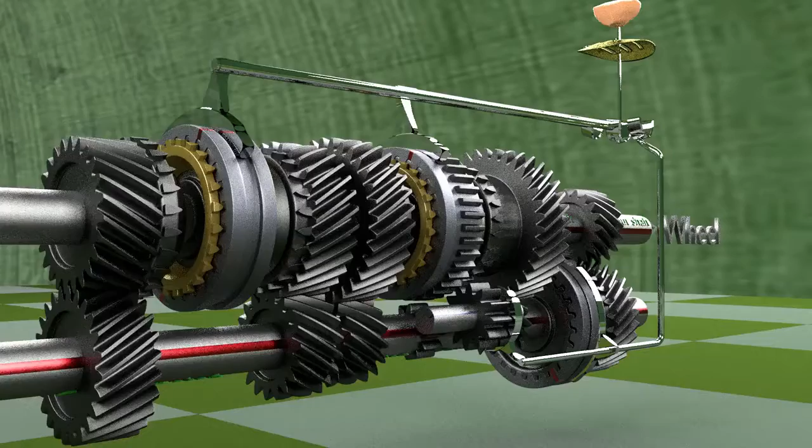A manual transmission, also known as gearbox, is a type of transmission used in motor vehicle applications that uses gears to provide speed and torque conversion from the engine to the wheels of a motor vehicle.

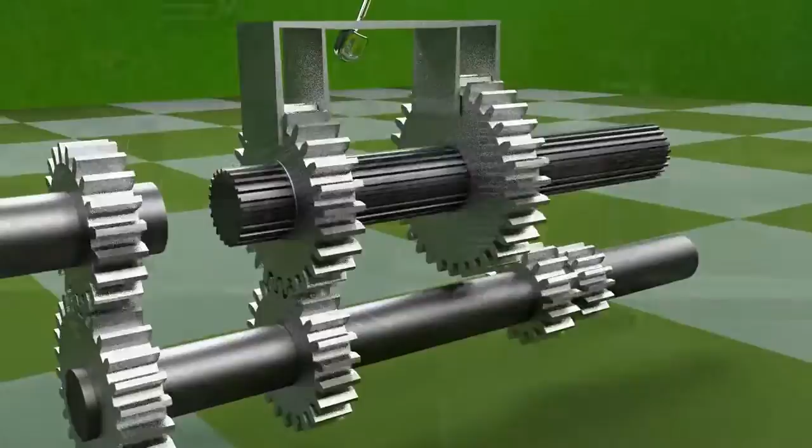In this video, the concept of gear ratio, sliding mesh gearbox, constant mesh gearbox, double declutching, and synchro mesh gearbox, which is used in most modern vehicles with manual transmission, will be explained.

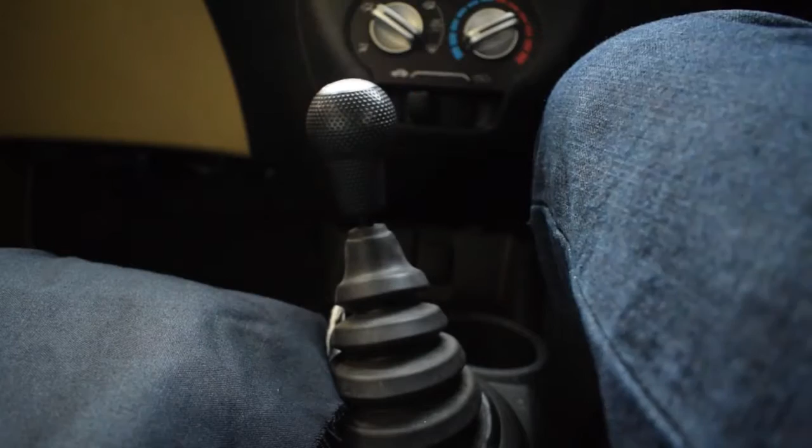Consider two gears which are in mesh with each other. The number of teeth on the larger gear is twice that on the smaller gear. Therefore, the smaller gear will have to make 2 revolutions for every 1 revolution of the larger gear, so that it can traverse all the teeth on the larger gear. That means the smaller gear is rotating at double the speed of the larger gear.

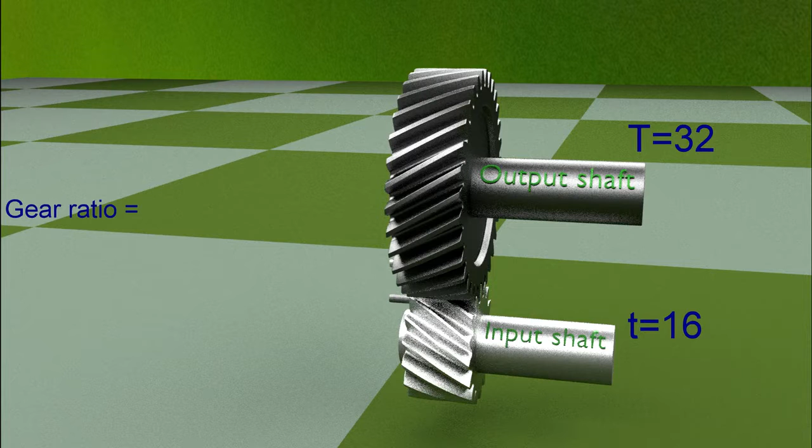The gear ratio is defined as input speed relative to output speed, and is equal to the number of teeth on the output gear divided by the number of teeth on the input gear.

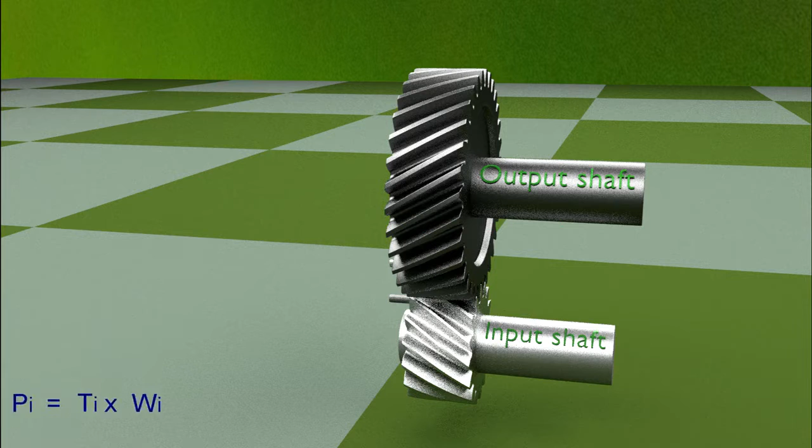The power input is given by input torque times the input gear rotational speed, and it must be equal to the output power, that is, output torque times the rotational speed of the output gear.

Since the rotational speed of the output gear is half of the input gear, the torque delivered by the output shaft will be double the input torque.

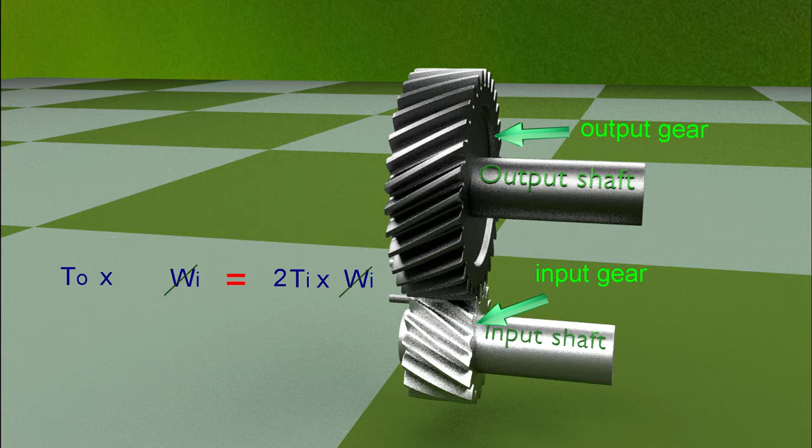This means that we can get large torque at low speed by applying low torque but at higher speed. This basic principle is used in a gearbox to achieve different torque and speed requirements.

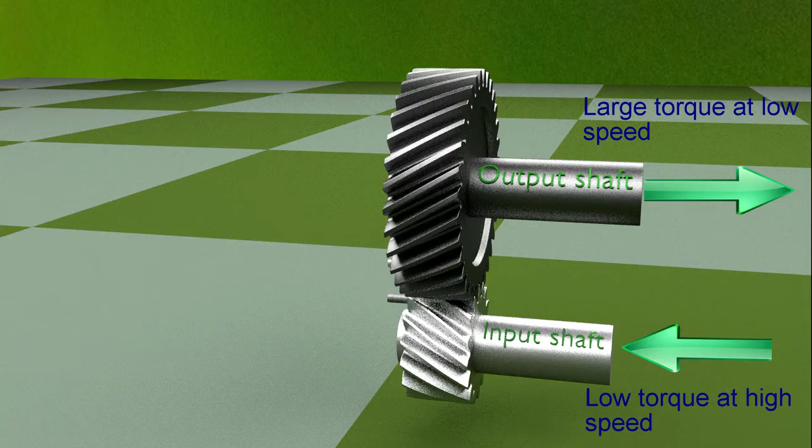An automobile requires large torque when starting from rest, climbing a hill, or pulling a load. In these situations, the speed of the vehicle is not so important. On the other hand, when running at high speed on a level road, high torque is not required because of the momentum of the vehicle, and it would be more preferable to just keep the wheels rotating at higher speed.

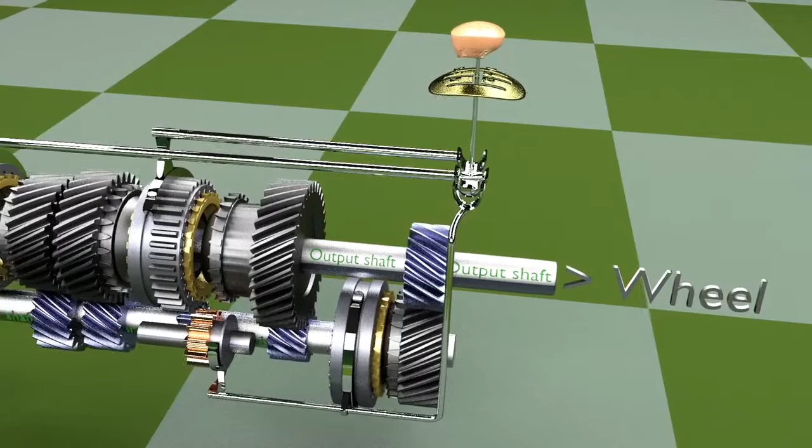The engine is not capable of working efficiently for such a wide speed range. Therefore, to permit this relative motion between the engine and the wheel, a set of gears called the transmission system, or gearbox, is used.

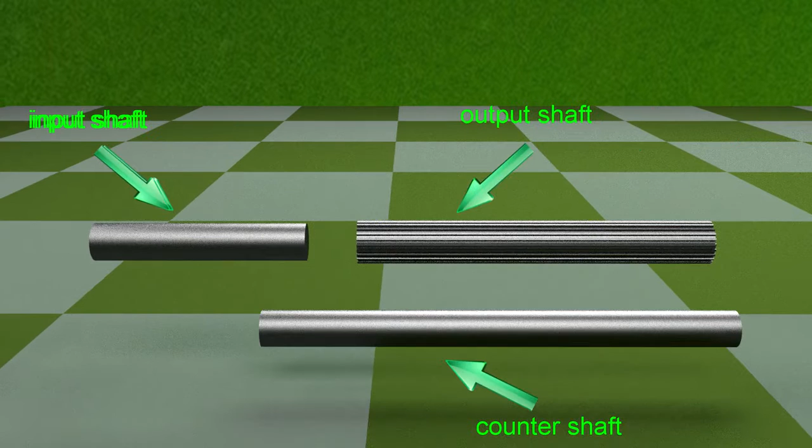A sliding mesh gearbox is the simplest and oldest type of gearbox. It consists of the input shaft, the output shaft, and counter shaft. The input shaft derives power from the engine and transfers it to the output shaft through gears mounted on the counter shaft.

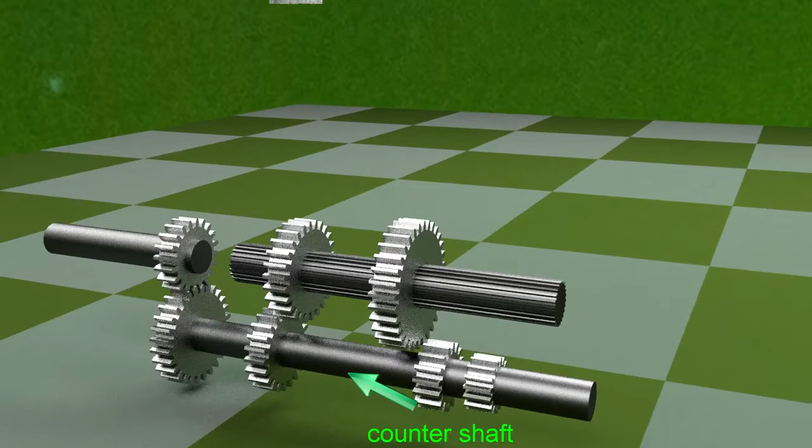The output shaft then transmits it to the propeller shaft for onward transmission to the road wheel. The input shaft contains a gear called the clutch gear, which is in constant mesh with the counter shaft.

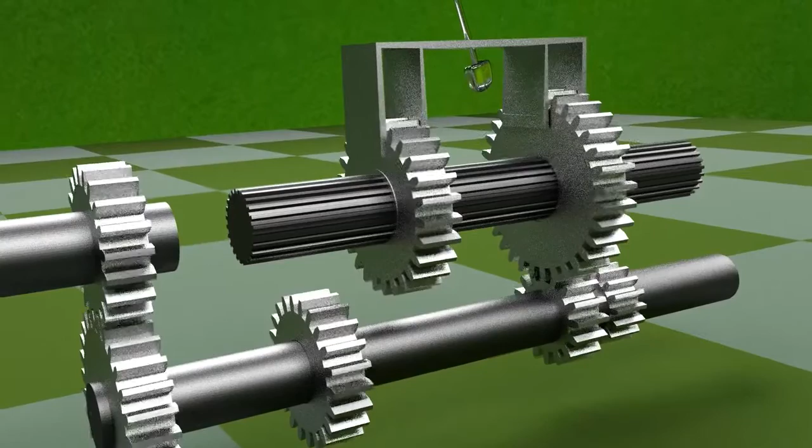The output shaft is splined, and gears on the output shaft can slide axially to mesh with the corresponding gears on the counter shaft, and therefore can have different gear ratios.

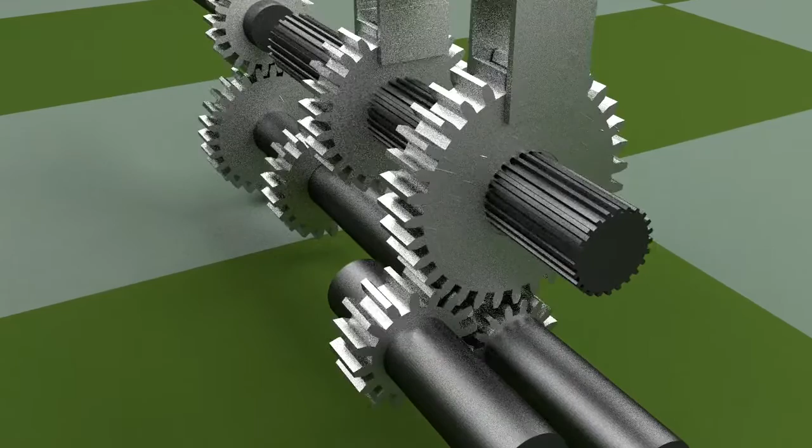Shifting gears in this type of gearbox is noisy and requires considerable skill to shift gear without damaging it. To overcome this difficulty, the constant mesh type gearbox was developed.

Similar to the sliding mesh gearbox, the constant mesh gearbox consists of an input shaft which derives power from the engine through a clutch.

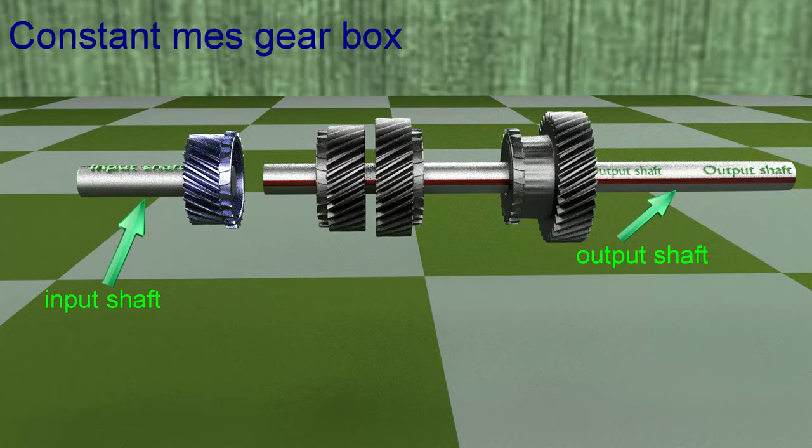The gears on the output shaft are not fixed and are free to rotate on the output shaft. These gears are shown by dark color.

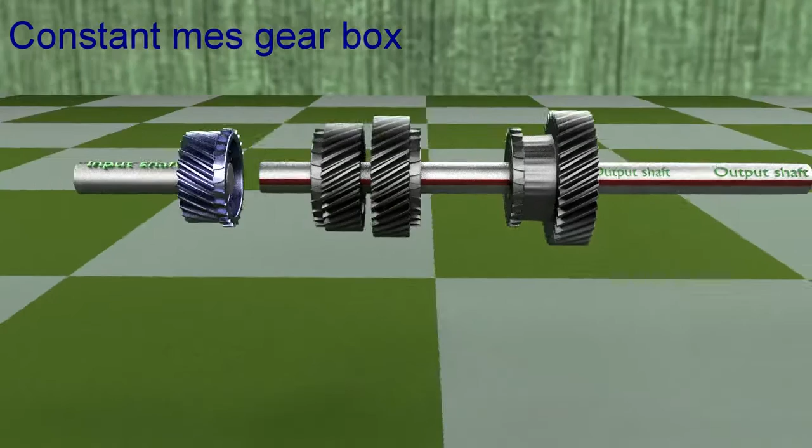Different size gears are fixed on the counter shaft and cannot have any type of motion relative to the counter shaft. The fixed gears are shown by blue color.

The gears mesh with the corresponding gears on the output shaft and always remain in mesh. These meshing gears have different gear ratios.

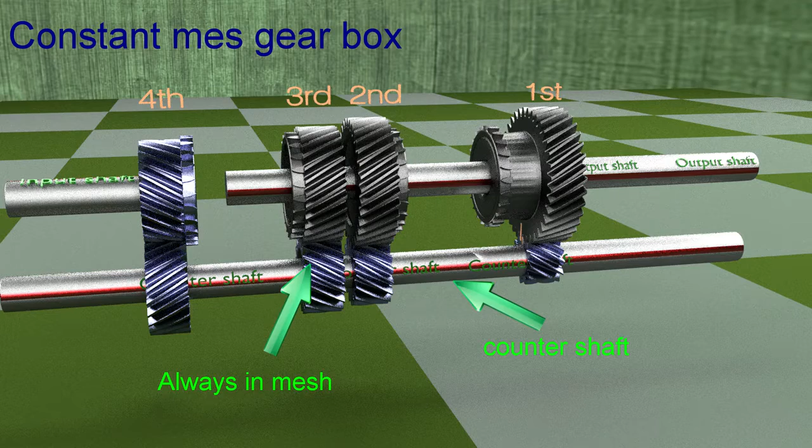For example, for the first gear, the larger gear has 3 times the teeth on the smaller gear. Therefore, the larger gear turns 3 times slower than the smaller gear and can transmit 3 times the torque available at the counter shaft.

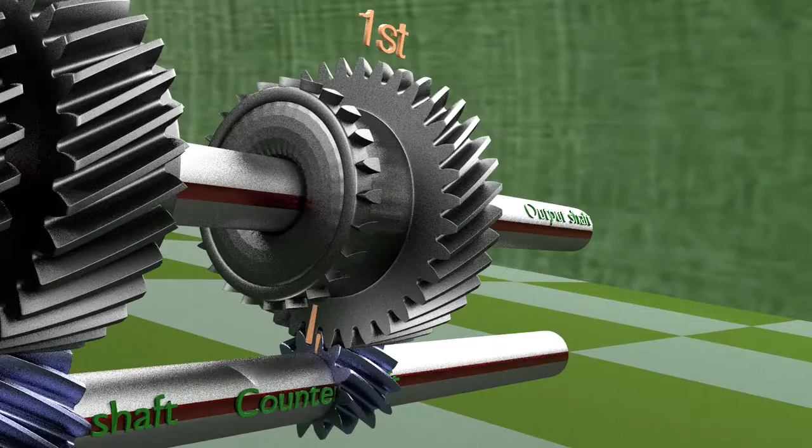Similarly, for the second gear, the number of teeth on the larger gear is 2 times the number of teeth on the smaller gear. Therefore, the larger gear turns 2 times slower than the counter shaft. In fact, all the gears on the output shaft rotate at different speeds according to their gear ratio.

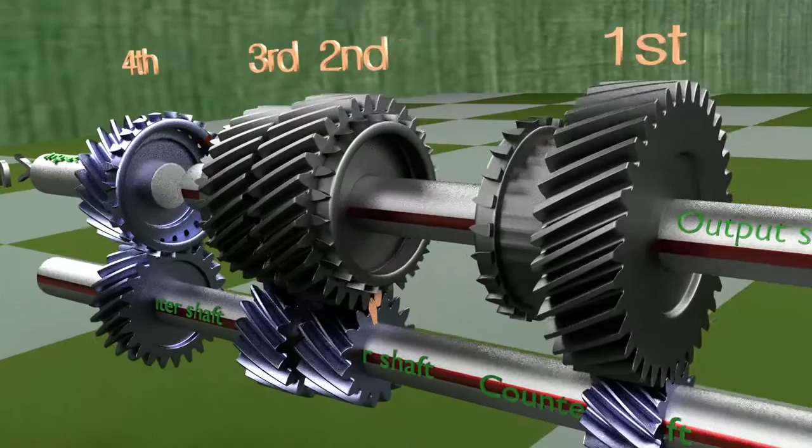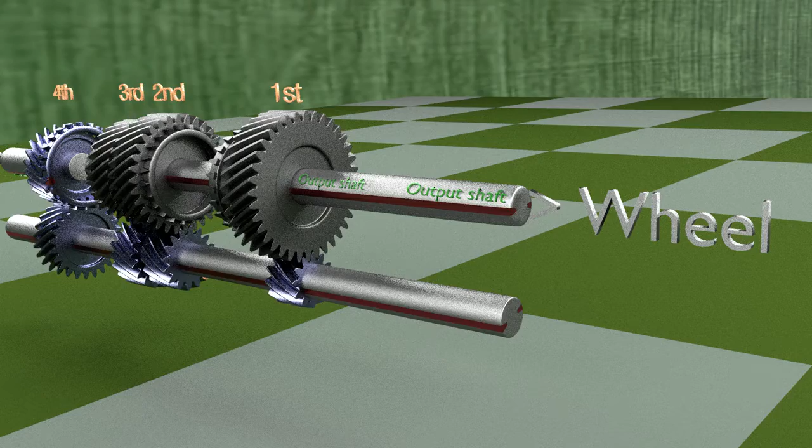On the other hand, the output shaft is connected to the wheel and hence rotates at a speed related to the wheels. For transmitting power to the output shaft, one of the freely rotating gears needs to be locked to the output shaft.

To do so, a hub is fixed to the output shaft. Thus, the hub rotates with the output shaft.

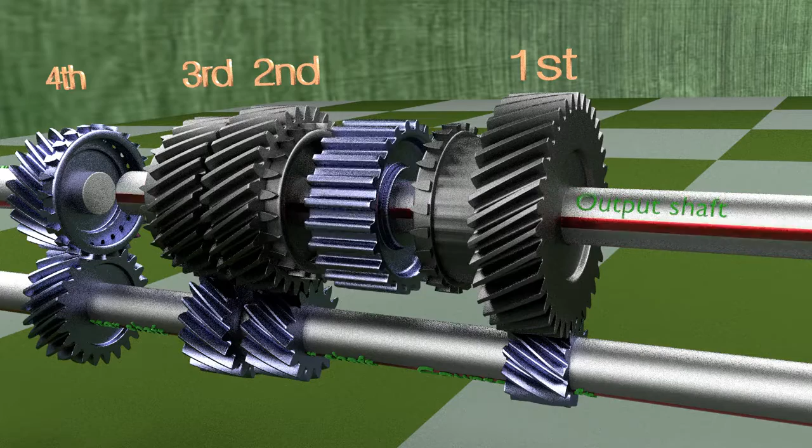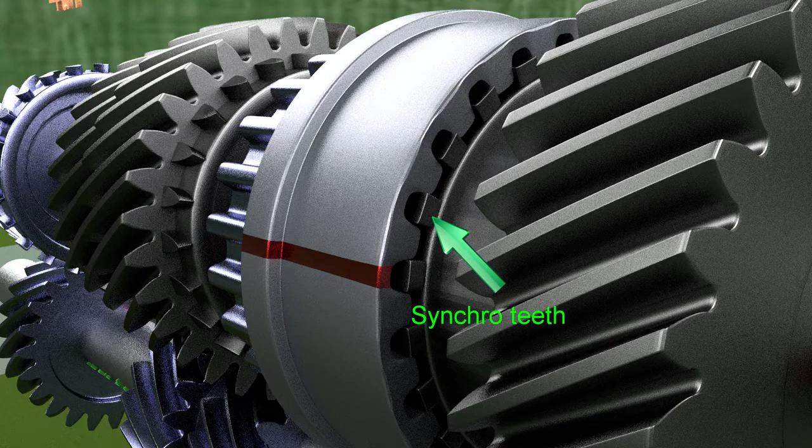A sleeve is splined to the hub and can slide axially on the hub. This sleeve can be slid and engaged with the synchro teeth on the side of the gear. This locks the gear to the output shaft through the hub.

Thus, the locked gear, the output shaft, shift sleeve, and the hub act as one unit and rotate at the same speed.

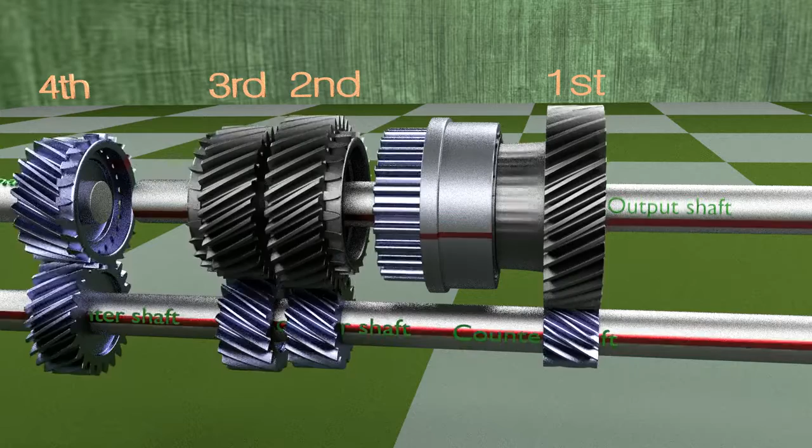Similarly, the sleeve can be slid to engage with synchro teeth on the side of the second gear, and hence second gear gets locked to the output shaft through the hub. Now second gear and output shaft rotate at the same speed.

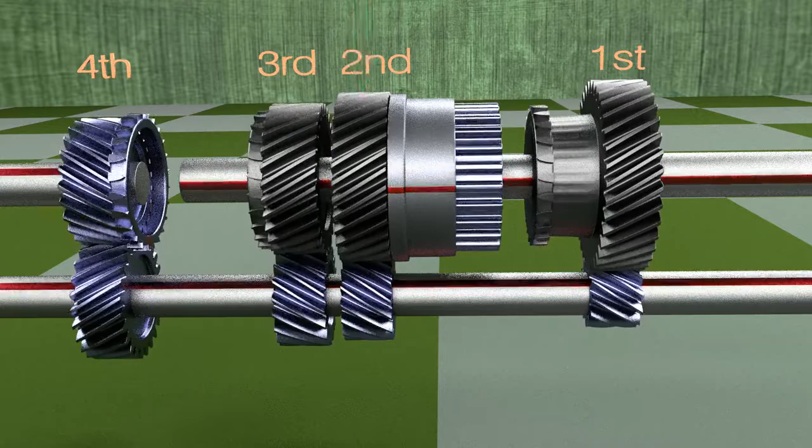And power is transmitted from engine to input shaft to counter shaft and then to the second gear. For locking third and fourth gear on output shaft, another hub and shift sleeve is provided. Engaging sleeve to third gear locks the third gear to output shaft. For fourth gear, the shift sleeve is directly engaged with the input shaft gear and power is transmitted directly to the output shaft without any speed reduction, referred to as direct drive.

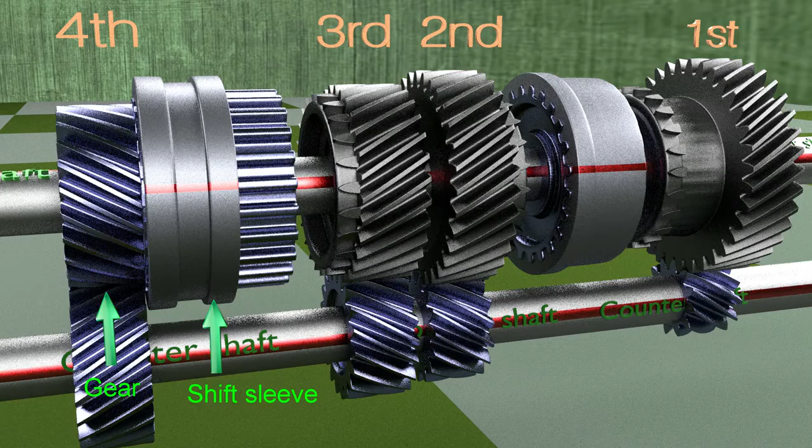But there is a problem. In constant mesh gearbox, for smooth engagement of shift sleeve with the gear, it is necessary that speed of the gear and the shift sleeve must be equal.

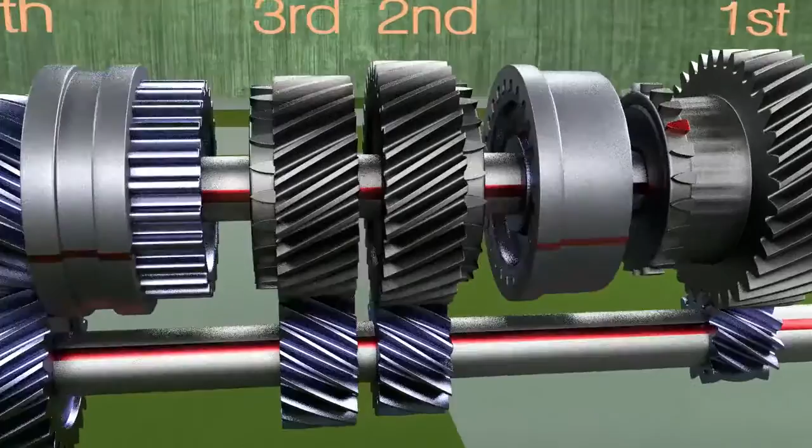Suppose we want to shift gear from fourth to first. At this position, the fourth gear is locked to the output shaft and hence the output shaft is rotating at the speed of fourth gear. Therefore, shift sleeve is rotating much faster than the first gear and as such the shift sleeve cannot be engaged with the first gear smoothly.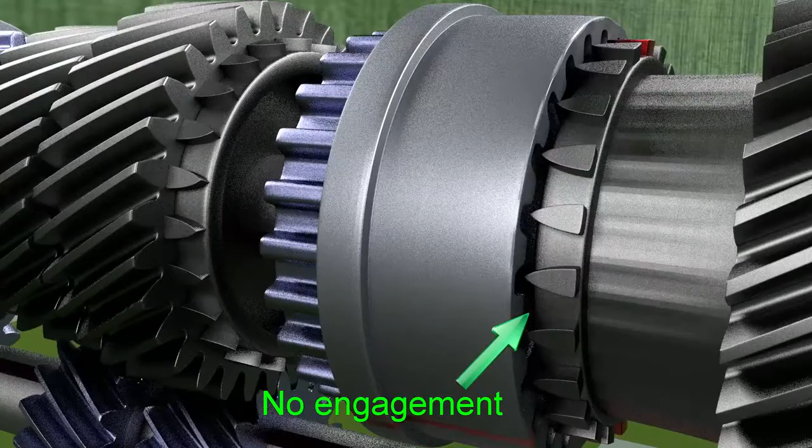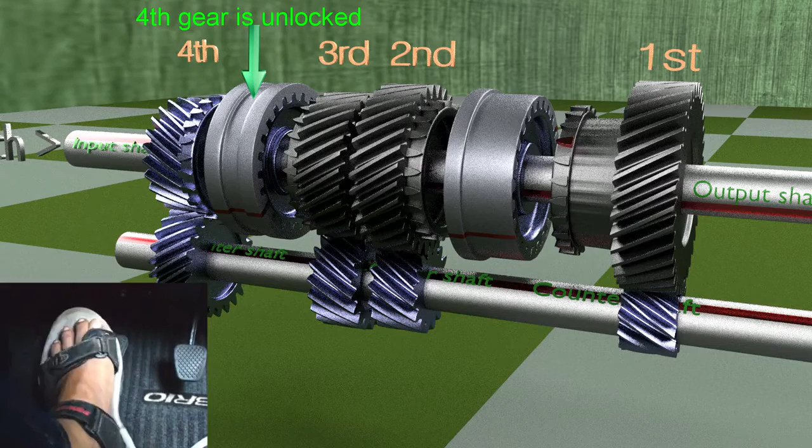To engage shift sleeve with the first gear, the speed of the first gear has to be increased to match the speed of the shift sleeve. To do so, the clutch is disengaged first by depressing the clutch pedal and the gear system is brought to neutral position. Then the clutch is engaged by releasing the clutch pedal and engine is accelerated to increase the speed of the gear system.

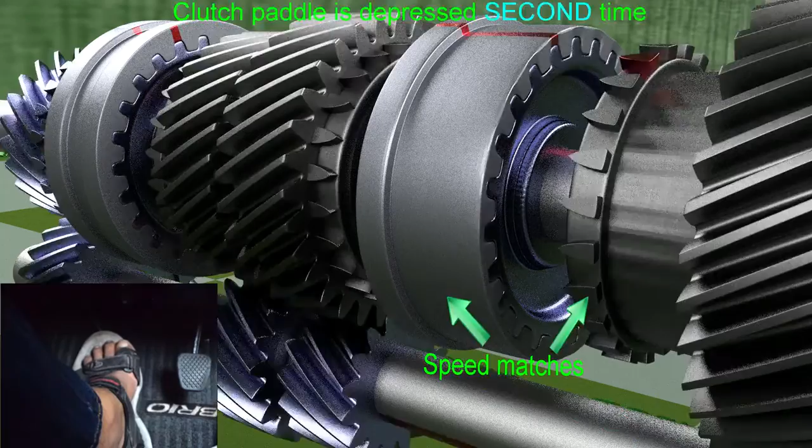When driver thinks that speed of the first gear matches the speed of the shift sleeve, the clutch is disengaged again, second time, and the first gear is engaged. Then clutch is re-engaged by releasing the clutch pedal. Thus, now power is transmitted through the first gear. Thus, in order to change the gear, the driver has to disengage the clutch twice. Therefore, it is referred to as double declutching.

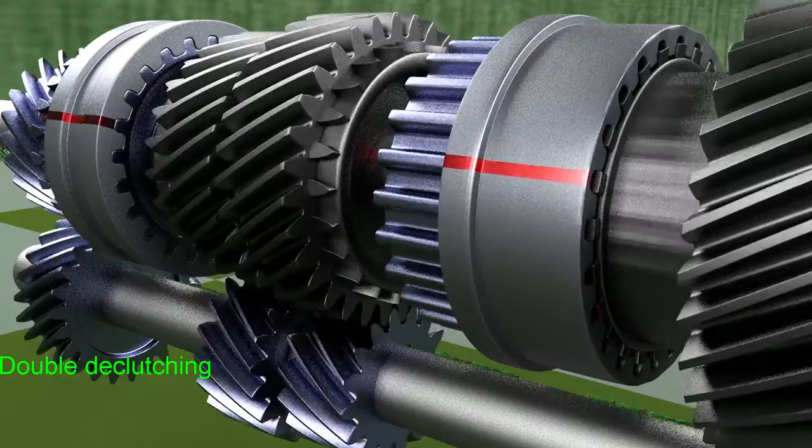To avoid this problem, most modern manual transmission vehicles are fitted with a synchronized gearbox. In synchronized gearbox, the speed of the shift sleeve and the gear desired to be locked on the output shaft is matched automatically.

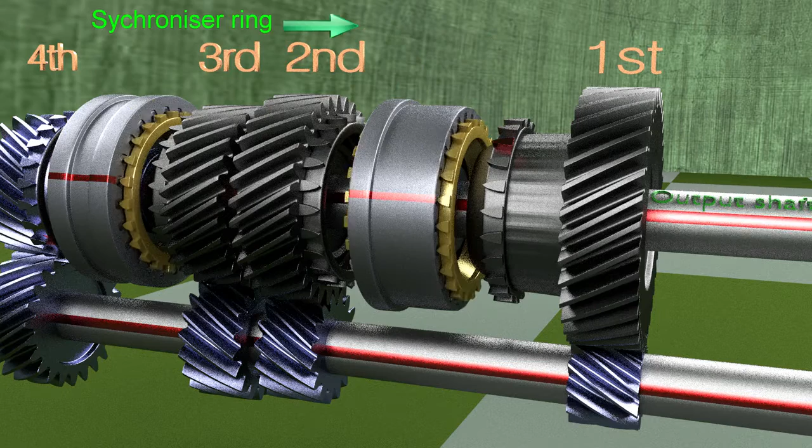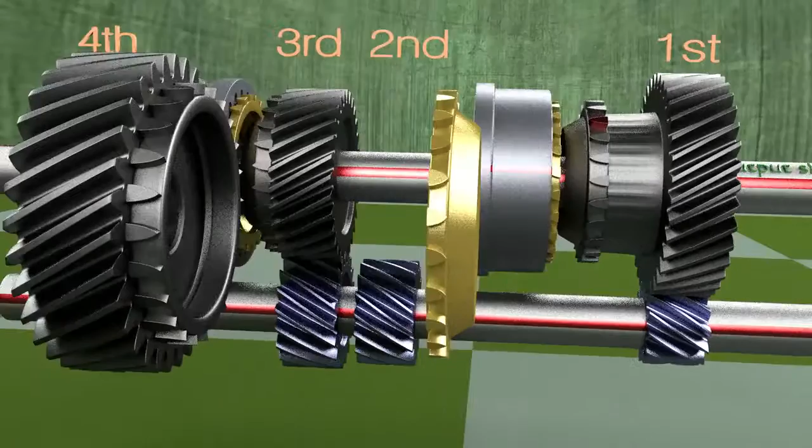This is done by employing a synchronizer ring. Synchronizer ring is fitted in such a way that it rotates with the output shaft and can also have axial movement. Synchronizer ring has an internal cone. The gears are provided with a mating cone which matches the synchronizer ring internal cone and forms a cone clutch.

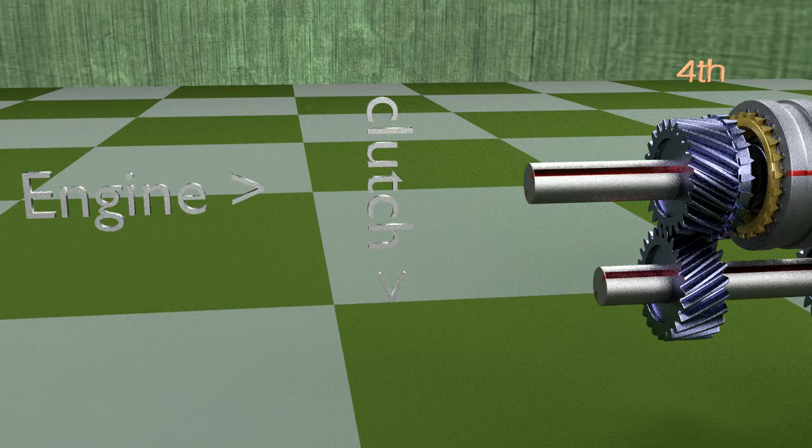Suppose vehicle is standing still and therefore output shaft is not rotating. Now we want to lock first gear to output shaft. For this, the clutch pedal is depressed so that engine is disconnected from transmission, and thus transmission system is rotating on its own due to its inertia.

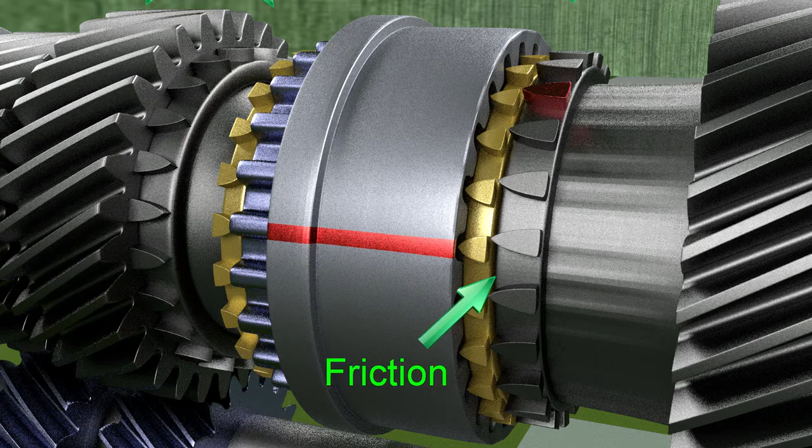Now when shift sleeve is pushed, before the teeth can engage, the cone clutch engages first. This causes friction between the synchronizer ring and the mating cone on the gear. This frictional force overcomes the inertia of the transmission and the speed of the gear matches the speed of the shift sleeve.

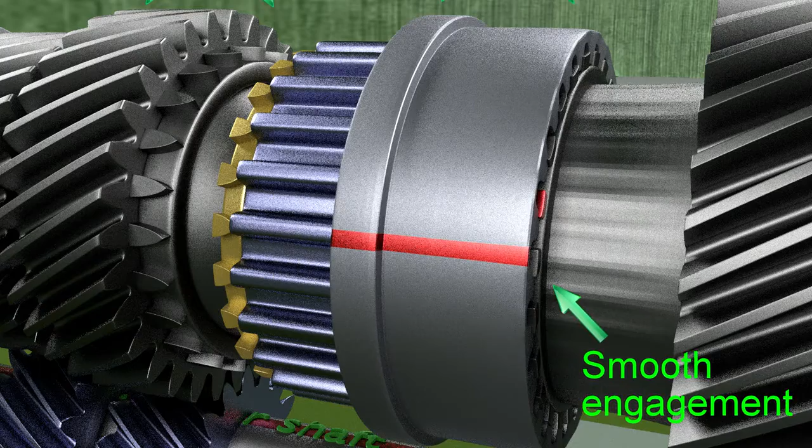Further pushing the shift sleeve causes it to smoothly engage with the gear. Then clutch is re-engaged by releasing the clutch pedal, and now power is transmitted through the first gear, which causes output shaft to rotate and vehicle starts moving.

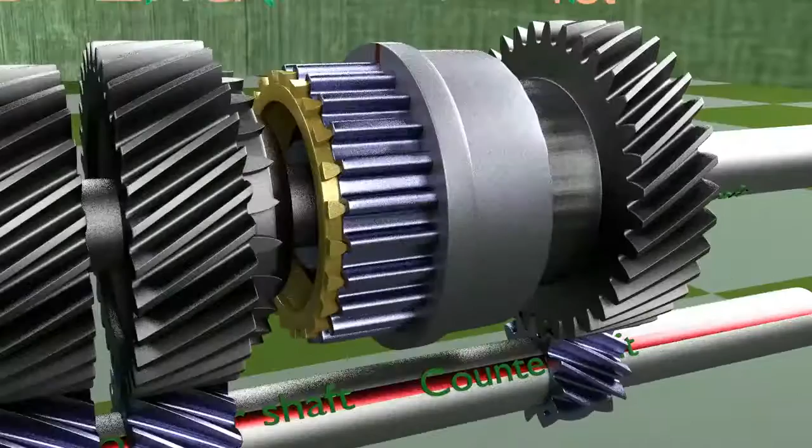Similarly, for the second gear, the friction between the synchronizer ring and second gear causes the speed of second gear to become equal to the shift sleeve, and the shift sleeve is engaged smoothly with the second gear.

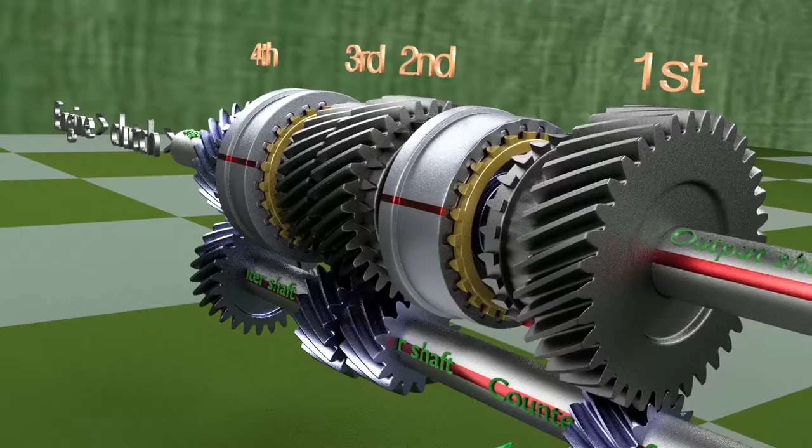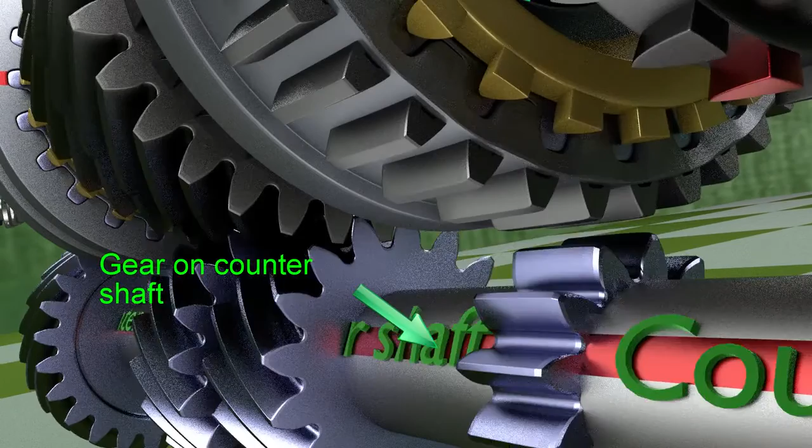For reverse gear, teeth are provided on shift sleeve and a corresponding gear on the counter shaft. These gears are not meshed directly. To connect them, an idler gear is used so that direction of rotation can be reversed. When reverse gear is required, the gear on counter shaft and that on shift sleeve is connected by shifting the idler gear, and thus output shaft rotates in reverse direction.

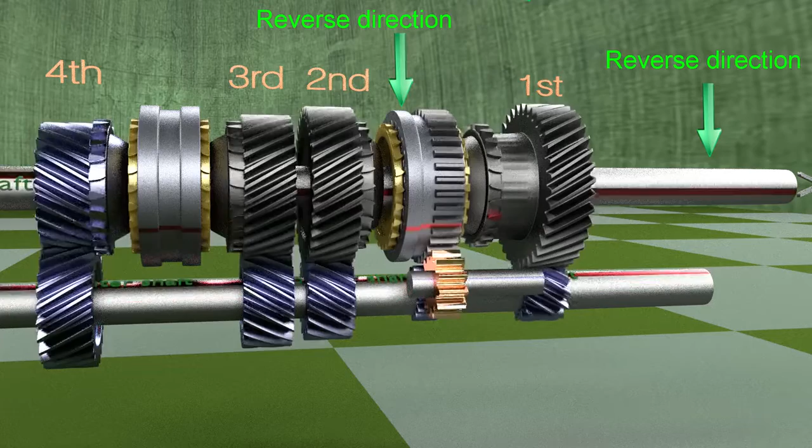Reverse gear is not synchronized, thus vehicle has to be stopped before applying the reverse gear.

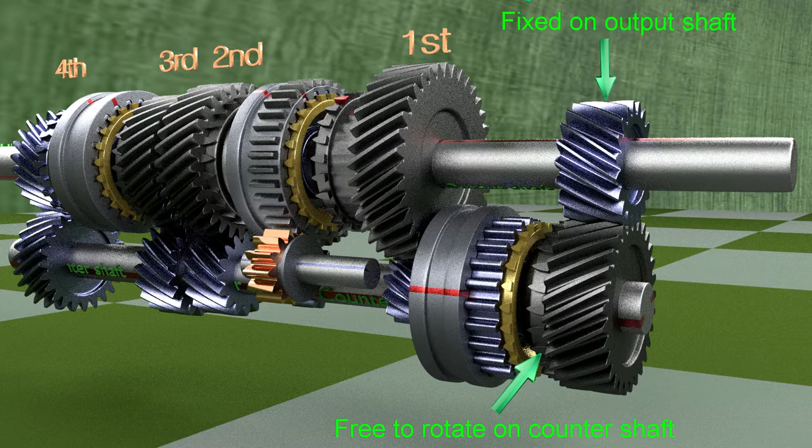For higher speed, a fifth gear is provided. In this case, the freely rotating gear is on the counter shaft and fixed gear is provided on the output shaft. The gear can be locked on counter shaft with the help of shift sleeve and a hub fixed on counter shaft.

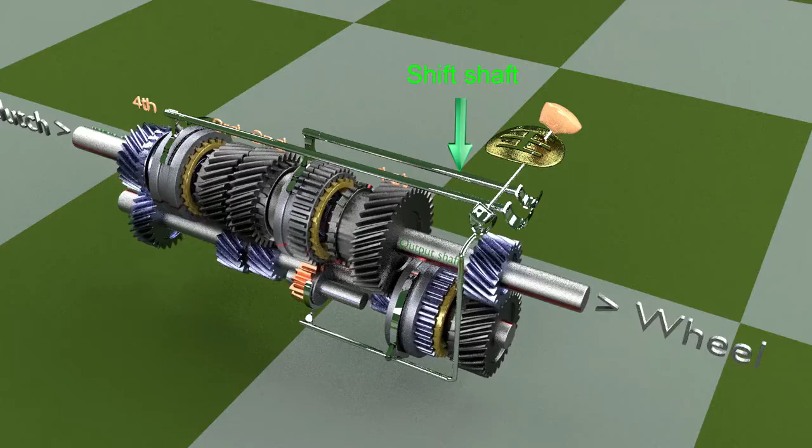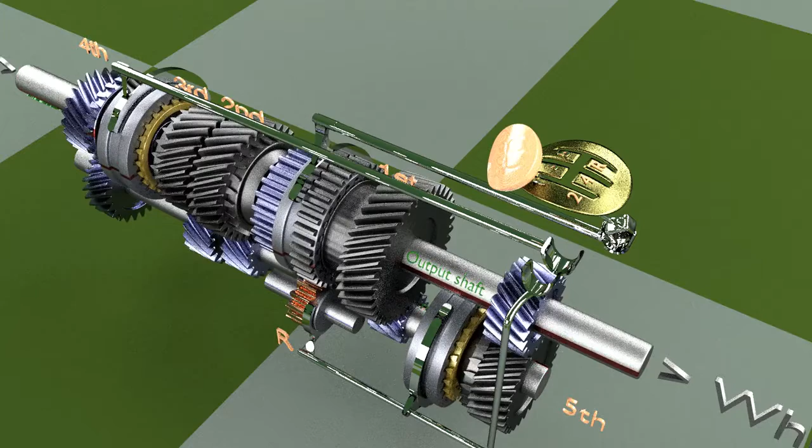Shift shaft are provided to change the gears. At this position, vehicle is in reverse. In neutral position. Now first gear is applied. Again in neutral. Now second gear is applied. Again in neutral. Now third gear is applied. Similarly, fourth and fifth gear are selected.